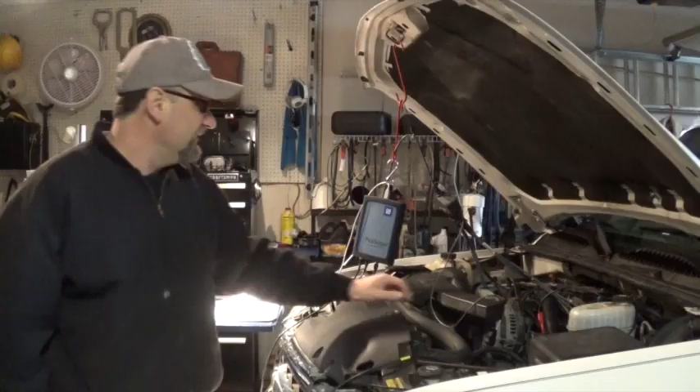Hello guys, today I'm going to show you my setup on a V8 engine on my Snap-on SI2000. This is a tool that you can actually get the ignition waveforms with. This is the 5.3 GM, it's a coil near plug system, which means that each plug has its own coil, but there is a spark plug wire in between, so we can hook up our leads to ignition pickups to

each spark plug. I've been using this now for a couple of weeks and trying to learn more about it and what the limitations are, and something that we learned last time on my last video, which I'm going to leave a link in the description, is that whether or not you are using all of these cables, you need to keep them all plugged into this tool. I used this on a BMW straight 6 engine, and one of these cables was unplugged and my firing kV was off.

So it has to do something with the internal impedance of this tool. My friend Robert from Texas figured that out, and if you unplug the cable, maybe this one from the positive side, and you're using this cable to get your ignition waveform, the firing kV is going to be higher. So that's just something to keep in mind. And I'm not sure if that would affect the Snap-on Verus or Modis. I think it will. As I said, I'm still new with this tool, but it's so much easier to use this tool on a Picoscope than Verus or Modis.

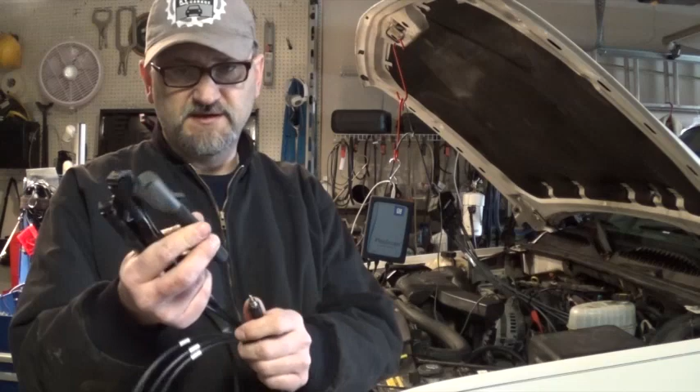So in order to see 6 or 8 cylinders, you have to buy another adapter, which is basically a quad cable, kind of like this one. With this cable, you can hook up 2 of these on the negative side on the yellow channel. Then you're going to have 8 inductive pickups that you can hook up to your cylinders. Now that gets really expensive, I'm not sure what the price is on this quad cable, and plus you have to buy these inductive pickups as well for each connector, and they are not cheap either.

And this can be used also on the coil-on-plug adapters that Snap-on has. But here's one of the limitations with this tool: you've got to have these cables if you want to do a direct ignition system on a V6 or V8 engine. Now the beauty of the Picoscope is that you can actually use both sides when you test a V8 or V6, because they're going to give us the same

waveform signal. So what I have now, I have my yellow channel, the negative side, hooked up to my bank 1, and I have the positive side, the green channel from this tool, on my bank 2. And on my Picoscope, I'm going to use 3 channels. The first channel, channel A, is going to be bank 1. Channel C, which is actually the green channel on Picoscope as well, I'm going to hook up to my green lead from my SI2000. That's going to be bank 2, and then we're going to need some kind of a sync to be able to identify our cylinders once we've got our waveforms.

And I'm going to use a signal for cylinder number 1. We can use different things; on this particular system, I'm going to use a signal from the PCM, just a square wave. It should be like 0 to 4 volts, something like that. We can use a current ramp with an amp clamp on one cylinder. We can also use maybe another inductive clamp and get the secondary ignition waveform from one of the cylinders. So it doesn't really matter, as long as you can get some kind of a signal from your cylinder that you're going to use as a sync, and then we're going to use a firing order to figure out what cylinder is misfiring.

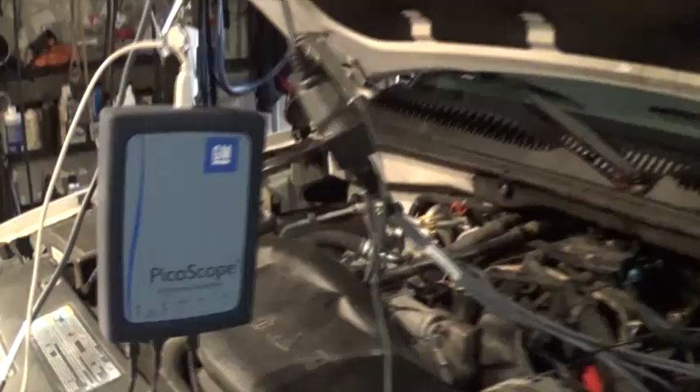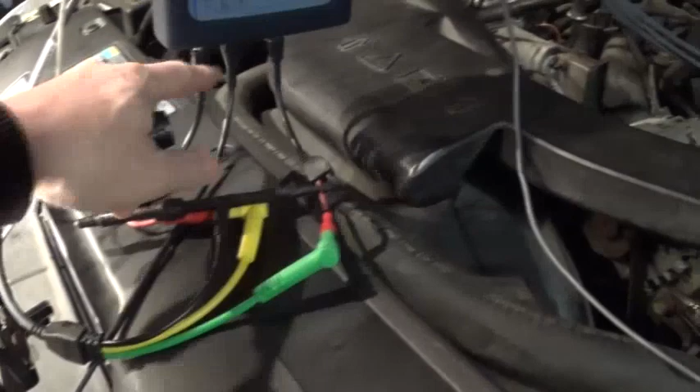Now I did piggyback the ground from my SIA 2000 to my channel A and channel C. And then my channel B will be just a signal from cylinder number 1, and there's a ground here for my channel B, and the ground from my SIA 2000. And all you gotta do is hook up your leads for inductive pickups right there. Now, which way you're gonna put them doesn't really matter. It is nice to separate the positive and negative side on the tool, but once you have your 4 leads, it doesn't really matter which way you hook them up to your wires, because again, we're gonna use a sync to identify our cylinders.

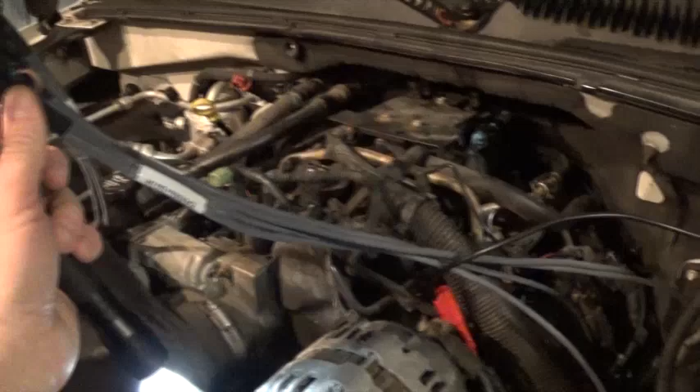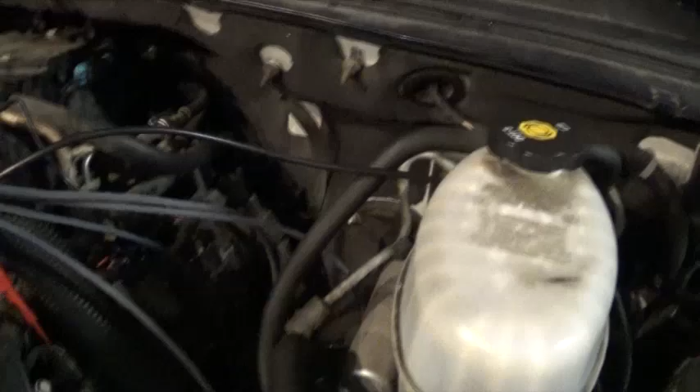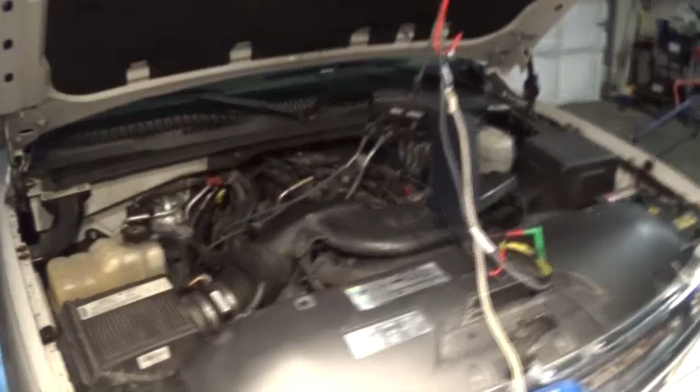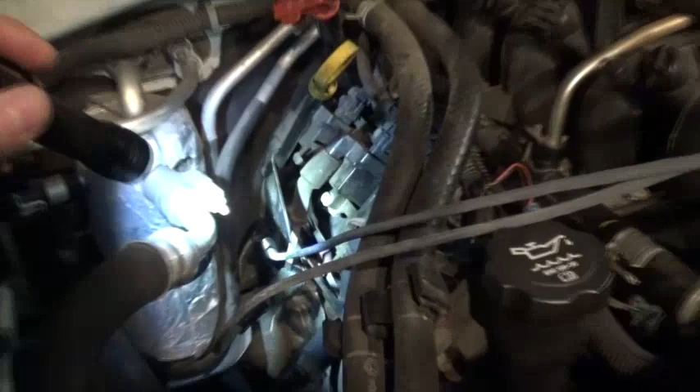And I actually used this side to reach the far back cylinder number 6, and actually number 5 and 7 on this side. I had to put a little hook here just to angle this. These cables are a little bit shorter than they should be. It looks okay, but once you start hooking up stuff on the other side, it gets a little bit more tight. See how on this side, maybe I should go underneath this hose, but that's okay. I got them all hooked up: 1, 2, 3, and there's one here. So there's number 2, actually number 4, number 6, and number 8 down the back. So that's it, and let's set up the Picoscope.

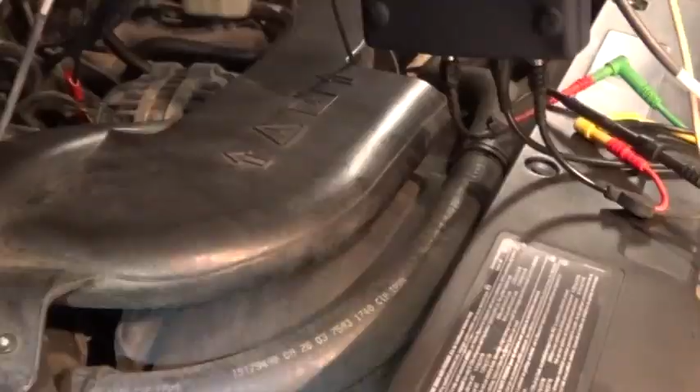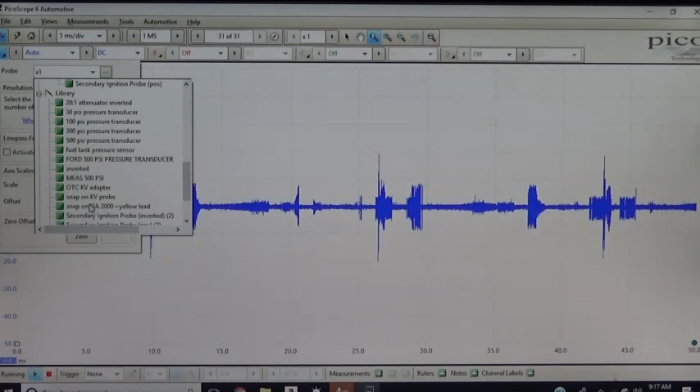So now this car has a slight misfire at idle. Let's see if we can find the misfiring cylinder. So the first step, I'm going to go to channel A and go to my probes. What I've done, as I said, is make a custom probe, and it's this one here, SIA 2000. The way this works, you open up your custom probes, go to new probe, and from here you're gonna set up your probe. I'm gonna go back to A.

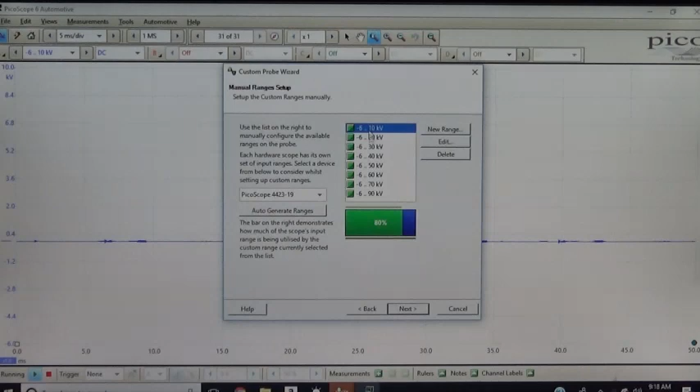I'm just going to go edit this channel so you can see what I've done. So go next. This is volt. So basically, the attenuation on these tools is 1 to 5,000. So in order to get the correct signal, you're going to put minus 5,000, and this is for the direct ignition system. And you set up your scalings at 10, that's what I did. You can do whatever you like.

And I put a 300 megahertz filter. You don't have to do any at all. And you're done. And SIA 2000. And I put a yellow lead, but you don't have to. That's just what I did. So let's press OK. I'm just going to start it.

So first, I'm just going to use a regular lead, so you guys can see what the signal actually looks like, and that's why we have to use our formula to get the signal the way it needs to be. Now with this formula, our PicoScope is going to calculate our power kV for us, and as I said, attenuation is 1 to 5,000. That's going to be the closest multiplication for PicoScope to figure out our kV.

So I'm just going to go to regular channel, and I'm going to go up to 5 volts, because the voltage output on these is between 3 and 4 volts, depending on the output. My B channel is going to be my signal. Okay, there you go. And that's my square wave. That's just the PCM telling the coil to fire the cylinder. So it's going to be 0 to like 4.5 volts or something like that. So I'm going to set this at 10 volts.

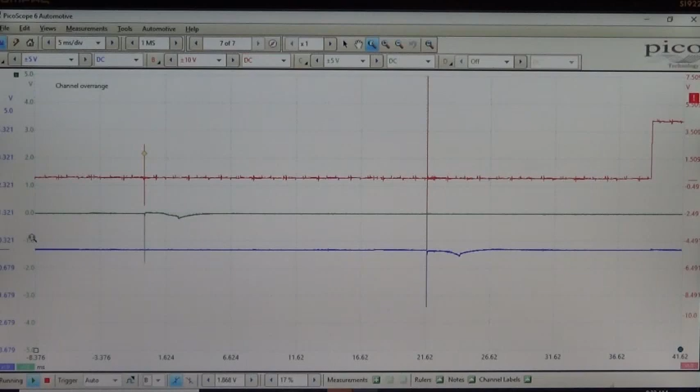It should be able to trigger. I don't know why it's not doing it. Oh, I put never. Oh my god! I put channel C to go to B. I'm sorry. All right, that's better. Okay, so now let's spread this out a little bit. Now this is my bank 1. We can see the signal is upside down. It's the same thing on bank 2. It is upside down as well.

So let's go. I'm going to check my sampling rate a little bit. All right. Okay, so I can stop this. So we can see now that my signal, this is my burn time, and this is the power kV. Everything is upside down. It's kind of hard to see, but that's what's going on here. So now here as well. So I'm going to invert these channels.

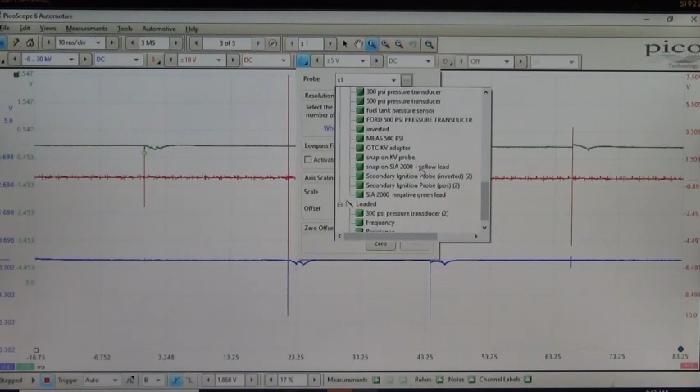We're going to go to channel A, and then we're going to use that minus 5,000, and this is going to flip our channel, but at the same time it's going to calculate the kV for us. I'm going to go to 30 kV, that should be fine. Now go to the green channel and do the same. Okay. I'm going to go to 30 kV, and then let's see now. We should have it. There you go.

As I said, the trigger doesn't work. There are a lot of spikes from these ignitions. Now we can stop, and there's one here. So now my waveform is configured the correct way. So now all I need to do is increase my time base, and as I said, this has a slight misfire at idle, so I'm just going to go to 500 milliseconds.

These are my signals here, and we can see my trigger up on the top on the red channel, and we're just going to use that as a sync now. And let's do one more. Now we can stop. Okay.

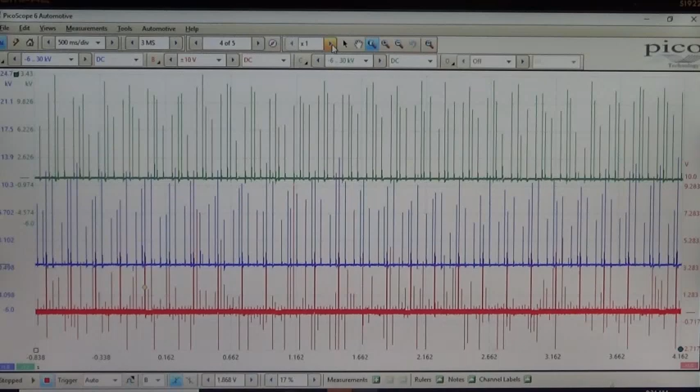Okay, so now I can go back. I'm gonna get the red channel down. Get these two. So remember, this is my bank 2. This is my bank 1. And what I like to do, instead of zooming in this way, I actually like this feature here, that I can kind of horizontally zoom in my waveform, and then I can just kind of go through each of them. There you go. See how nice that is.

And so now this is my trigger, and now we can identify the cylinders. I should have eight firing events here. So 1, 2, 3, 4, 5, 6, 7, 8. So I got all 8 cylinders on the screen right now. Now the firing order will be 1, 8, 7, 2, 6, 5, 4, and 3.

So if you want to look at bank 2 only, there would be 8, 2, 6, and 4, and on bank 1 will be 1, 7, 5, and 3. And that's that easy. That's the beauty of the Picoscope, that you can set this up a lot faster. And now all you gotta do is just go through the buffer and see if you can spot any problems on any of these cylinders.

Now we can zoom in a little bit more if you want. This is 20 times to 50 times. I think 20 times will be fine for now. We should be able to find a cylinder that's giving us a problem. And of course, we can rev the engine up and capture data as well, and then zoom in as well. So far everything looks okay.

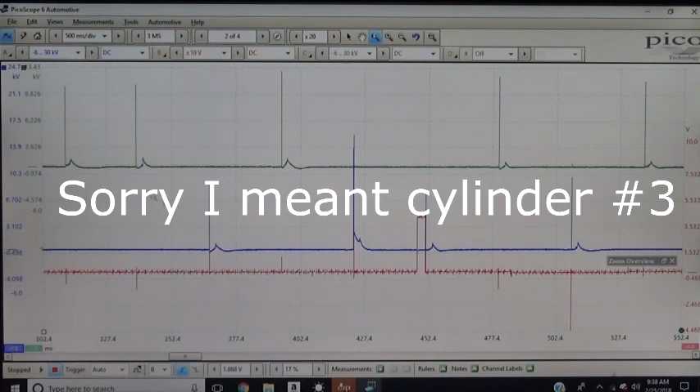And then you go backwards. You go 1, 7, 5, and 3. But if you go backwards, it's gonna be 3, 5, 7, 1. So this is cylinder number 3, and now this is a clear example of a problem with the plugs and wires. This is outside of the combustion chamber where the spark kV, and actually you can see the power kV is a lot higher as well right there.

This is 12 kV, but here's the spark kV. Let's see, 2.4. Now these numbers are not always exact, but that doesn't really matter. What you're looking for is this problem here. When you see this, let me kind of zoom this in now. This is where you have an open. This is outside of the combustion chamber.

Basically, this spark kV tells you that it needs more energy to jump the gap on the spark plug, and at idle, the compression and fuel mixture ratio should not change. So there should be no reason for this spark kV to change. Now, it would be ideal to actually see that spark kV on every cylinder. Right now you don't even see it. It's just the nature of the signal that you're going to get, and it's going to be different every time.

But the beauty of this system is you're going to be able to compare to other cylinders, and clearly you can see a problem here. So every time you see this, it's going to be a spark plug and wire. Sometimes it can be a coil, but on this system, if you see this on multiple cylinders, you know you're going to need to change spark plugs and wires.

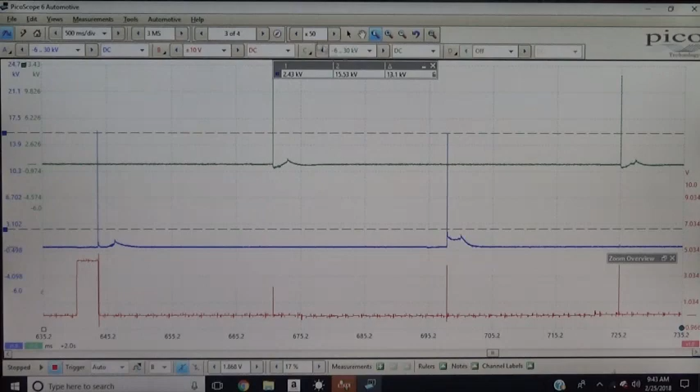Okay, so now I'm gonna unplug the injector. So this is number 1 now. I'm gonna unplug an injector and see if you can identify which one I unplugged. I'm just gonna let it run again. Now with the lean misfire, we have to rev the engine up. Will you be able to see that at idle? So let's just demonstrate it real quick. I'm going to unplug the injector now.

Okay, I've got the injector unplugged. I'm just going to stop this. You can look at the waveform at idle, and then we're going to rev it up. Okay, I'm going to zoom in, zoom out. Alright, so when we look at these waveforms, we really can't see much at all. They're pretty much the same.

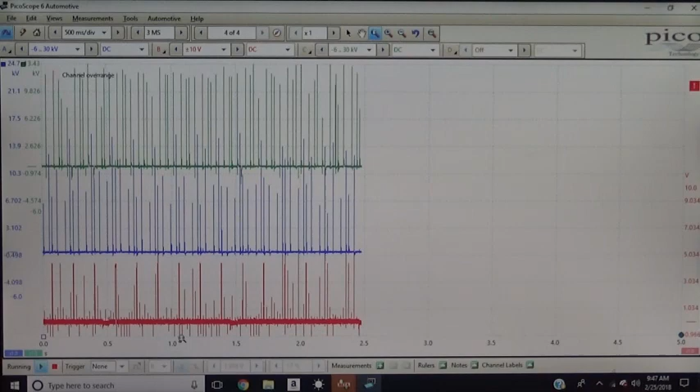Okay, so when you do wide open throttle, what I do actually, I look at the screen, and when the new screen comes up, I rev it up. You don't want to do it at the end of it, because you're gonna miss your events. And it's kind of interesting that you still have a signal from the PCM, even though basically the power was cut off on the injector and coil.

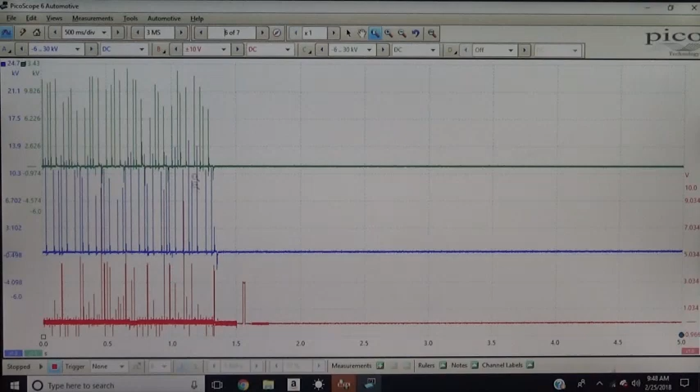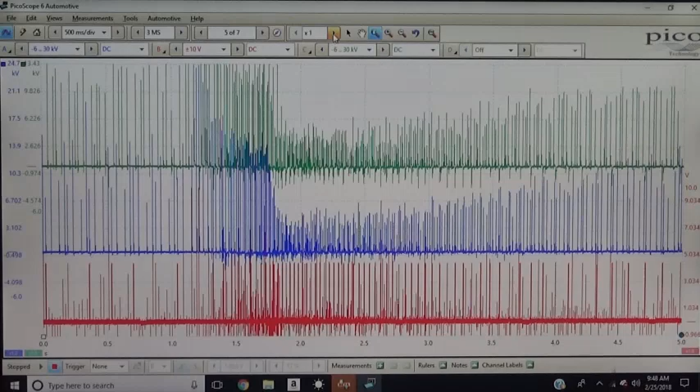Okay, so let's see here. So this is wide open throttle. See what I did actually? I was waiting for my waveform to come to here, and then I revved it up. So now I can have the full event on one screen. And now we can zoom in.

I can actually look here to know exactly when it's my wide open throttle. It should be kind of this area. Okay, so let's see now. There's a little more. Okay, so here's this kind of indication of the problem with those plugs and wires. See how the power kV went so high, and so we're gonna concentrate on this one here.

That's it. Let's see here. Down. And here's my lean misfire. That's very nice. Look at that. That's a high resistance. Let's see how far my kV went up, because the high resistance I cannot even measure it anymore. That's a very nice capture. And my burn time is a lot shorter.

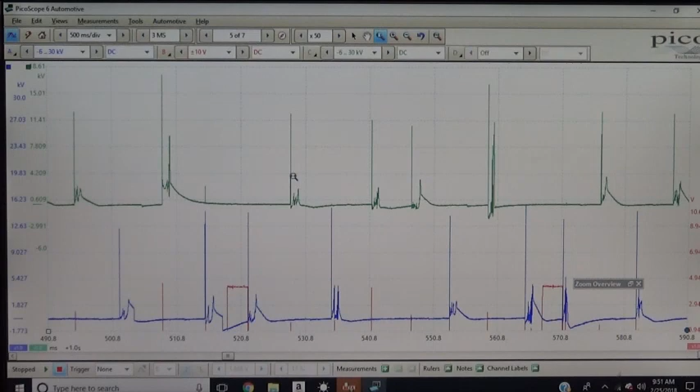Now I can see that one of my cylinders has a lean misfire. And by using the sync, I can identify my cylinder as being 2, 6, 4. I mean, I'm sorry, 8, 2, 6, and 4. Oh, look at that. It's pretty cool. There's one here. Wow, look at this. Wow. Right there. Here.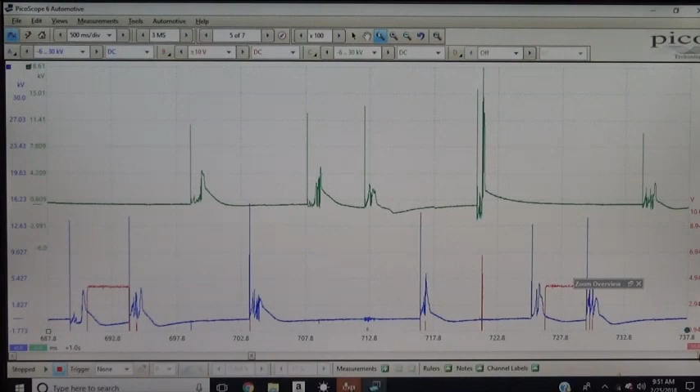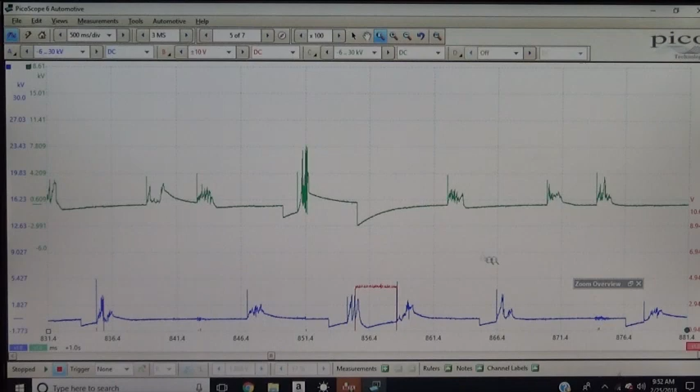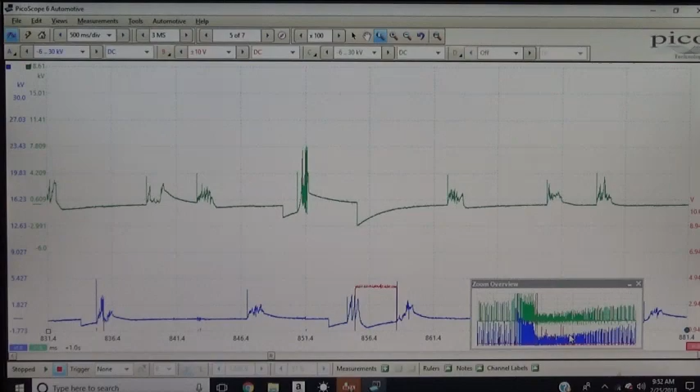Okay, and I'll just show you guys that I unplugged cylinder number, injector number 4. Just gonna go over there real quick. And let's see here. So here's my number 2. Here's my number 4, and then I got number 6 and number 8 in the back there. Yep. 8, 6, 4 is unplugged. There's 2. Okay.

Alright guys, well I hope you guys enjoyed this video. Now this setup, of course, you will do when you really have a hard time to pinpoint your misfiring cylinder or cause of a misfire. If you can do a power balance test by simply unplugging the coils and find your misfiring cylinder and change the coil or spark plug, of course you're going to do that. But in some cases where we really have a hard time to identify the misfiring cylinders, and sometimes the PCM can actually identify the wrong cylinder that can really screw you up, this is a great way of finding that problem.

As I said before, on the Snap-on tool you can do it as well. The only problem again is that you can only use the negative side of your tool, and then you have to buy more adapters. Now on the Snap-on you can actually use both negative and positive leads by simply going into a lab scope instead of an ignition scope. You can just go to a lab scope and do pretty much the same thing I did with Picoscope. Just deploy 3 channels, 1 channel from each.

We're going to use the negative side of your SIA 2000. The 3rd channel is going to be your sync, and you can do the same thing with a Verus or Modis as well. Again, the Picoscope is a lot faster and resolution is a lot better, but it's possible to do the same thing with the Snap-on tools as well. And if you guys want me to, I can make that video. Again, it's not going to be as good as Picoscope, but you can still use them.